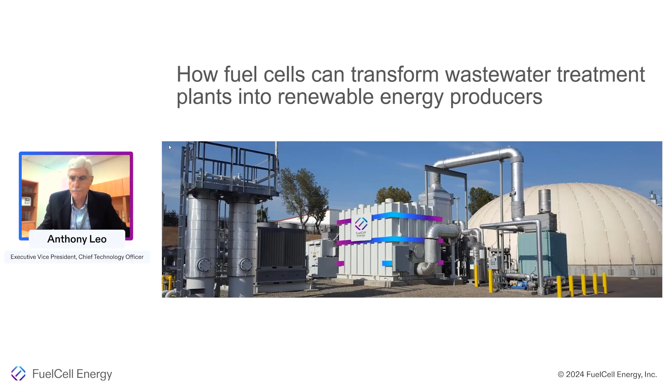Thanks, Luke, and good afternoon, everyone. I'm Tony Leo from FuelCell Energy, and I would like to talk about the things that fuel cells can do for wastewater treatment plant operators. And first, I'd like to spend a couple slides just talking about the company for those of you who may not be familiar with FuelCell.

So FuelCell Energy, we're based in Danbury, Connecticut, which is where our corporate headquarters is, our R&D facilities. We have a manufacturing facility about an hour away from Danbury in Torrington, Connecticut. We have facilities just outside of Munich in a town called Taufkirchen in Germany for final assembly and service of our European installations. And we have a facility in Calgary, Alberta, Canada, that is doing R&D and manufacturing of our solid oxide cell technology. What FuelCell does is we use electrochemical platforms to produce low carbon or zero carbon power, to capture CO2, and to produce hydrogen.

And if you look at the cluster of logos to the right of this slide, we have a variety of different customers, including utilities that buy power from our platforms, private companies that use our platforms for on-site combined heat and power generation, municipalities that install our fuel cells at wastewater treatment plants, which is obviously the focus of today's discussion. And we have been in business since the 60s. We have about 500 employees. And just under 100 of our platforms are in operation around the world.

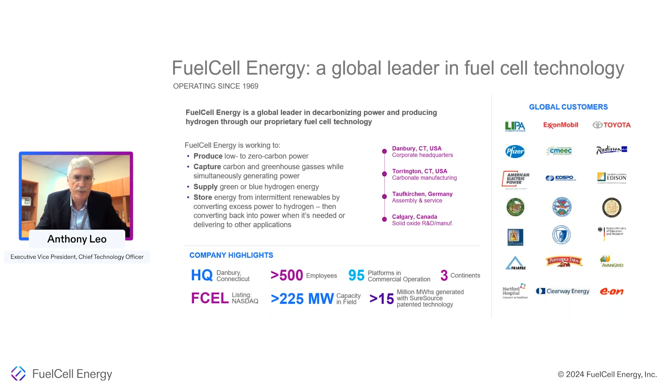Fuel cells, if you fuel them with a hydrocarbon fuel like natural gas or biogas, will produce a CO2 emission. But what's different from fuel cells and heat engines is that when they make CO2, it's before there's been any mixing with air, so it's very easy to extract the CO2 from these platforms before it gets emitted. I'll talk a little bit about that as we go along. The carbonate fuel cell, because of its unique electrochemistry, can actually capture CO2 from an external source, so we're looking at deploying that for carbon capture applications.

Both of these fuel cells are very fuel flexible, and so they can run on hydrogen blends or pure hydrogen in the case of solid oxide. Solid oxide can be run in reverse as an electrolysis platform to make hydrogen. And if you think about storing that hydrogen and using it back in a fuel cell, you start to enable some interesting long duration energy storage concepts.

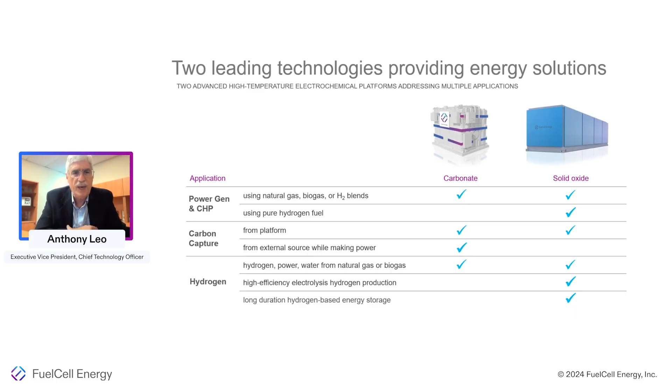So a fuel cell consists of a fuel electrode, an air electrode, and a thin layer between them called the electrolyte matrix. On either side of those electrodes is a thin corrugated steel layer that allows for the flow of gases, the air gases on one side and the fuel gases on the other side. That cell will make electricity when it's provided with fuel and air.

There are 400 of these cells stacked in the stack behind them, and that's our standard stack. And 4 of those stacks go into our standard module, which after DC to AC conversion and parasitics nets 1.4 megawatts. So one of those modules is used in our 1.4 megawatt platform, 2 of them in our 2.8 megawatt platform. We also have a platform that co-produces hydrogen along with power that uses 2 of those modules, and nets a little bit less, about 2.3 megawatts, because some of the power is used to compress and purify the hydrogen.

Both of those platforms can be configured to co-produce carbon dioxide as well, and I'll talk a little bit about that. So that 2-module system is the biggest system we make, but larger projects are done primarily by putting multiple units at a site. At the lower right is the biggest project in the world.

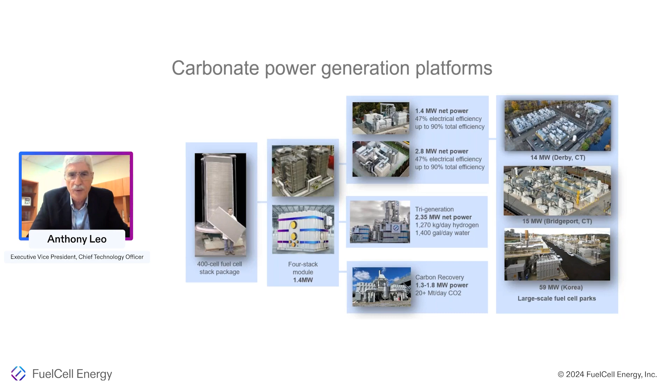It's a 59 megawatt system just outside of Seoul, South Korea. And you can see a 14 megawatt and a 15 megawatt system in different towns in Connecticut that have been put together from multiples of the 2.8 megawatt platform.

That system makes a good chunk of the power that they need. It also makes all the steam they need, so they've been able to turn off their gas-fired steam generators, which enhances the sustainability. And the other advantage is that in the event of a grid loss, which is unfortunately frequent in that area, the system can continue to make power feeding a dedicated isolated load. That's one of the key features of these systems, the ability they bring for resiliency.

We use waste heat in that system to make extra power in an organic Rankine turbine generator to enhance the sustainability and efficiency of that. That's an example of one of the advantages of fuel cells: 15 megawatts in the middle of downtown Bridgeport, Connecticut. You just couldn't put an engine generator or a gas turbine generator where we've put this system.

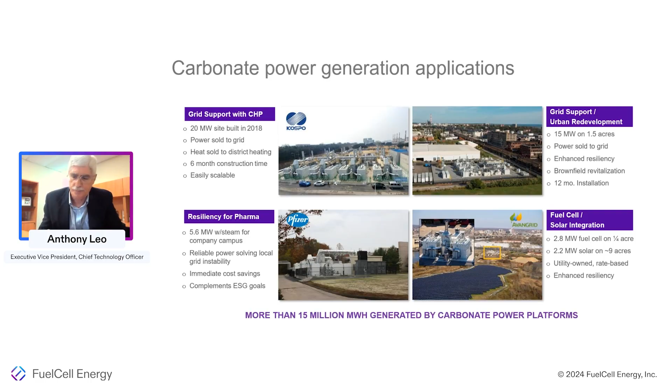If you look at operating these fuel cell systems, even a fuel cell system fueled with natural gas is still producing less CO2 than the average US grid, or many grids around the country, per kilowatt hour.

And so we avoid emissions while we run. We don't avoid as many emissions as wind and solar when they run, but we run around the clock and they don't. So when you look at that effect, we can actually avoid more emissions, more CO2, more NOx, more particulates than zero emission wind and solar, just because of our higher capacity factor.

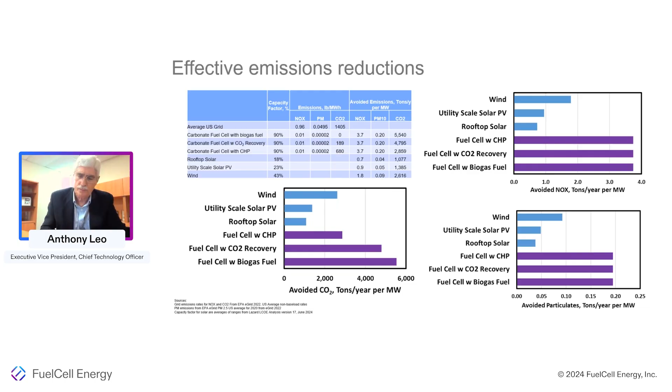So how can we apply this technology at treatment plants? We see a lot of benefits to the use of this kind of technology at wastewater treatment plants. Obviously, the on-site production of clean power and heat has immediate benefits to the plant operator. And in many cases, that electricity produced is not only renewable, but it's less expensive than what's available from the utility. Largely that's because you're using what is essentially a waste product, the methane from the digester, and you don't have to upgrade it to natural gas standards.

You have to do some cleanup. And so in many areas, especially like California, that could produce more economical power than the utility. That stems from the utilization of on-site biogas. You avoid flaring, you avoid the emissions from other types of combustion-based generators like engines or microturbines that have NOx and particulate emissions that the fuel cells don't have.

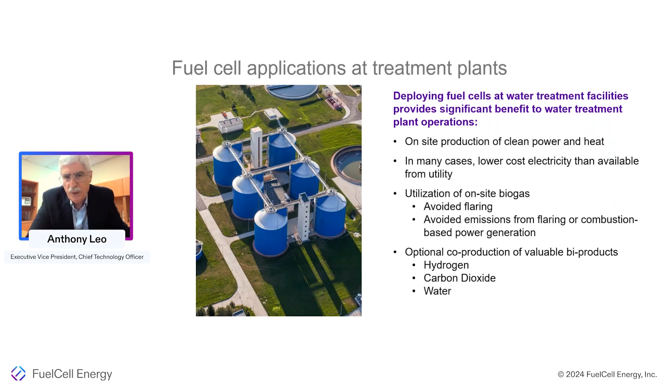And the other thing, which I'll talk about a little bit, and this is kind of new to us, is the optional co-production of valuable byproducts. We've done, and I'll talk about them, some wastewater treatment projects, but they haven't yet had these features except for the first ones that we're introducing now, where in addition to power and heat, we can optionally produce hydrogen, carbon dioxide, and water. So I'll talk a little bit about those new features that we're introducing.

So this is our approach to biogas, essentially, is we take the digester gas from the digester, and I'll talk a little bit about its constitution, but we essentially have to dry it out, take out the sulfur and the siloxanes. We can leave in the CO2 diluent and send that right to the fuel cell. The fuel cell produces electricity, and it also produces heat, and of course the digesters use heat. A few slides down, I'll give an example of the amount of heat and power that matches with a certain size of digester.

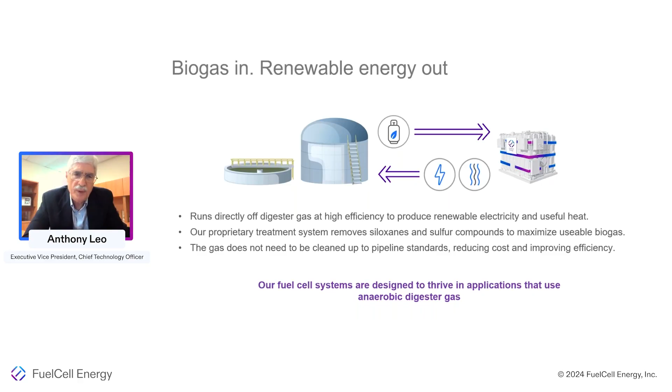So that's the key feature, is there's less cleanup needed compared to if you wanted to inject it into the natural gas grid. And as I'll talk about, carbonate in particular is uniquely suited to this because of its chemistry.

So what are the differences between natural gas and digester gas? We started thinking about commercializing carbonate fuel cells in the late 1990s and shipped our first commercial system in 2003. We were designing these systems for natural gas. It's 90 to 100% methane, and the balance is usually higher hydrocarbons, 900 to 1,000 BTUs per cubic foot. It's very dry, almost never has any oxygen in it except areas that used to do peak shaving. And it's odorized for safety with a little bit of sulfur put in, typically 3 ppm, at most 20 ppm.

And that sulfur is a poison to fuel cells, so we have to clean that out. We have a system in every one of our platforms that cleans out that sulfur. If you look at digester gas, it's much more dilute. It's 50 to 80% methane. Most of the municipal wastewater treatment digesters are about 60% methane, 40% CO2. The higher concentration methane content is what we see in, say, a brewery or a food processor digester. So that's 500 to 800 BTUs per cubic foot versus 1,000 for natural gas. It's typically 550 BTUs per cubic foot.

It comes out of the digester saturated at the digester temperature, so it's high humidity. It can have oxygen from bleeding into the digester for some types of digesters, so it can have a little bit of oxygen in it. And the sulfur, instead of being up to 20 ppm, is hundreds of ppm or even higher, and it also contains siloxane. So as we started to commercialize based on natural gas, we got a lot of interest in using these systems in biogas systems because it's both methane fuel. You just have to deal with these differences.

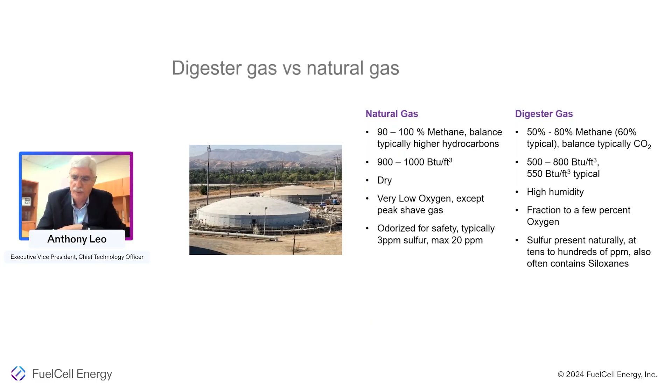And in fact, as things rolled out, what happened is that first system that we shipped commercially in 2003, the customer told us relatively late in the development of the project, by the way, I want to run this on my digester gas.

So this was a project that was going to a Kirin brewery in Japan. And they told us fairly late in the development of the project that we don't have line of sight to getting the LNG that we need to fuel this, but we do have a digester that we use to reduce our solid waste as we make beer. So we'd like you to run this on digester gas.

So we took a look at it, and we realized that we had the capability to do that. We had to do some extra upfront cleanup that we put together. And that was our first commercial system. It was a 250 kilowatt system at that brewery in Japan back in 2003.

That was followed by a couple other projects at breweries, a few food waste digestion applications in both Japan and in the US, and a lot of municipal wastewater treatment plants. Along that way, we learned what to do and what not to do in this application, and we developed this advanced feature set.

We had to make sure the systems had the flow capability to handle that lower BTU content and still make the rated output. We recognize that some of these digester sources fluctuate and are not 100% reliable, and we like to keep the fuel cell running. So we developed dual fuel features where if the digester output went down, we could augment it with natural gas, and then blend back to the full digester gas when it became available.

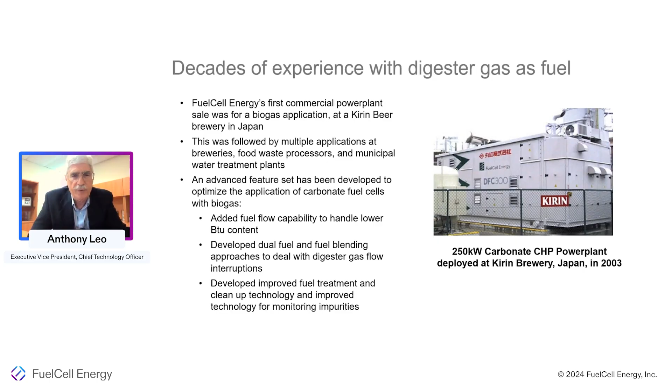That's really helped us as we've addressed this market with some very unique capabilities. So here's a summary of those advantages. The one thing I mentioned is that you don't have to upgrade the fuel to natural gas standards. You have to take out that water, you have to take out the sulfur and the siloxanes, but you can leave in that 40% CO2.

And that's because carbonate fuel cells don't particularly care about that CO2. As I'll show in a couple slides, there's a slight performance impact for our solid oxide fuel cell, but with the carbonate electrochemistry, there's one electrode that actually likes the extra CO2, and there's another electrode that has an impact. So at net, there really is no impact of the CO2 dilution.

I mentioned that we've developed these dual fuel capabilities that allow us to deal with the fluctuations coming out of the system. And the gas cleanup, we've really optimized that, primarily looking at reliability as the key thing. We don't want to have system issues that end up poisoning the fuel cell. So it's laid out there schematically in terms of the raw sulfur removal, compression and drying, siloxane and sulfur removal, and then polishing, and then it's ready for the fuel cell.

And just to make sure that the gas is as clean as it needs to be, we've developed some patented approaches to continuously measuring very, very low sulfur levels, because there wasn't off-the-shelf technology available. So they're deployed primarily as combined heat and power platforms, and as you know, there are plenty of uses for heat in a wastewater treatment plant. I'll give you some examples of some of these systems deployed in CHP applications at wastewater treatment plants.

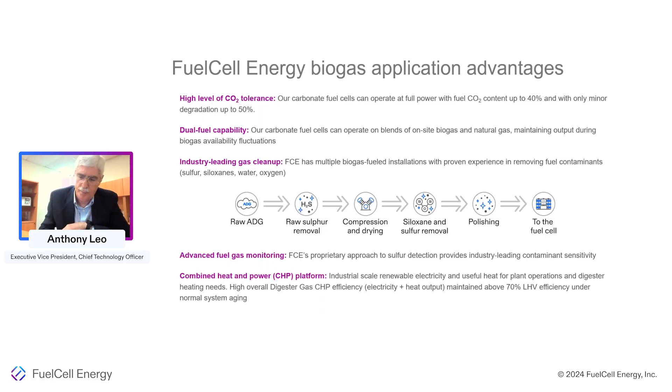So here's three of the most recent. There's a 1.4 megawatt system at the city of Riverside in California, and it essentially produces electricity for use on site by the city of Riverside. As is almost always done in these projects, the waste heat from the fuel cell is used to support the anaerobic digester. The heat is fed back into the digester in a hot water loop.

At San Bernardino, California, a very similar system, a 1.4 megawatt system. This is power that is consumed on site, and the heat again supports the digesters. And at Tulare, again in California, that's a 2.8 megawatt system.

In this particular case, Tulare already had on-site power generation. They didn't need the power, so we sell the electricity. The renewable electricity from the unit is sold into the grid under California's BioMAT, which is a renewable feed-in tariff program.

So different business models there. In the case of the other two, it's on-site power generation, reducing the utility offtake. In case number 3, we're buying the gas from Tulare and producing power that we sell under that feed-in tariff to the local utility.

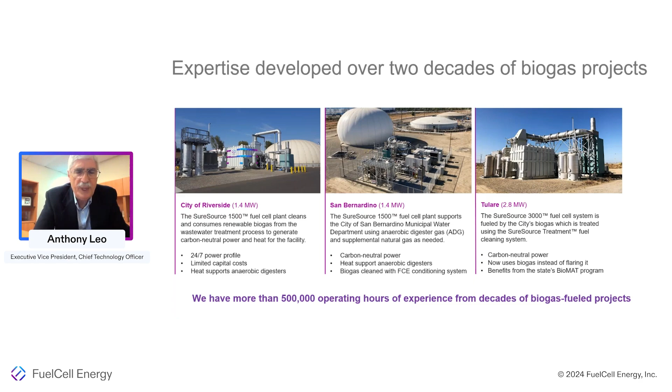And so, like I said, 2 decades of biogas projects since that first one in 2003, more than 500,000 operating hours. And so we've had the time and experience and the bruises here and there to really optimize the way these things interface with digesters.

We were the first distributed technology to be certified by CARB for operation on biogas at low emissions. CARB, the California Air Resources Board, runs a certification project for distributed generators. It has been in place for many years for natural gas fuel generators, and they started some time ago to certify biogas systems. What they basically do is have a third party test your emissions, and they certify that you're below some target emissions around NOx, SOx, VOCs, and carbon monoxide. We have that certification for all of our platforms.

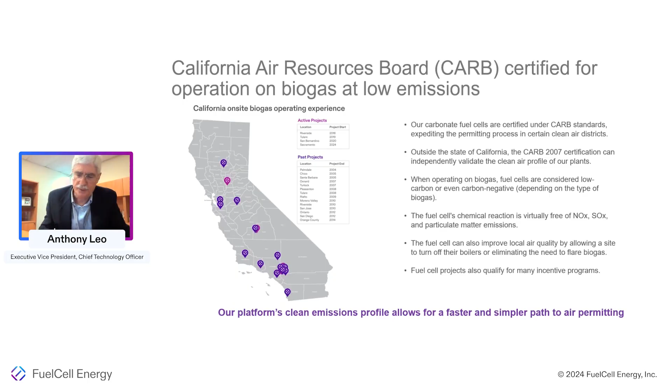And that map on the left shows the current and past projects. We've been doing these projects for a long time. Some of them have just run their normal project life. We continue to do them, and we just announced one recently for Sacramento Sewer District. We continue to operate the units we have there and expect to announce more projects as we go forward. So just a little bit of a technical discussion about the equipment.

This is the specifications for the carbonate fuel cell power generation platform. We have 2, one that makes 1.4 megawatts and the other that makes 2.8 megawatts. There's a lot of heat available for recovery, very low emissions. Both of these systems' specifications are the same, whether running on natural gas or on-site biogas.

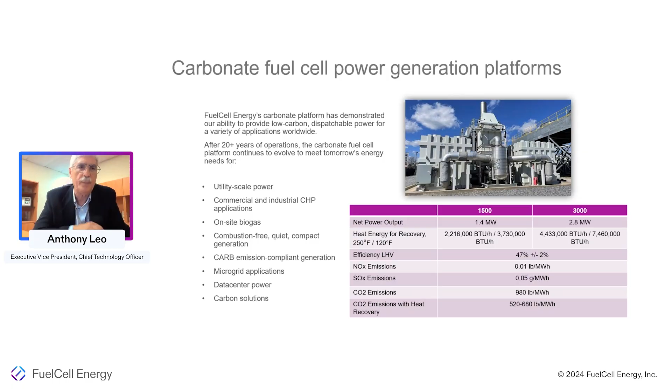This is the specification for our solid oxide platform. You'll notice there are 2 different sets of specs, slightly different for natural gas versus biogas. Solid oxide doesn't have that advantage carbonate has in terms of the electrochemistry not being affected by CO2 dilution, so efficiency drops down a little bit, but we can still make the same amount of power. The real advantage of this platform versus carbonate is we've had to walk away from a lot of opportunities at smaller digesters because the carbonate platform is just too big. So this platform at 250 kilowatts will help us address that market as we go forward.

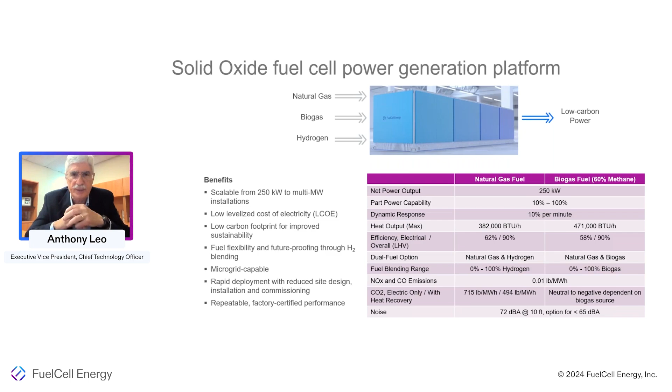Just to give you an idea of the size matching of these systems to a digester, this is an illustrative view of how much fuel a carbonate fuel cell makes as it makes power. This is an example of a 1.4 megawatt system. It runs at 47% efficiency, so it needs about 3 megawatts of fuel. That would come from, and this varies depending on the type of digester, something on the order of a 45 million gallon a day digester, which would be a good match for a 1.4 megawatt system.

That 1.4 megawatt system puts out more heat than is needed to support that amount of digester production, but typically we're matched to a digester that's much bigger than what we need, so they need all the heat we can provide. It produces 1.4 megawatts of power. In this example, 1.4 million BTUs per hour of heat supports the digester operation, and there's about 2 million BTUs per hour of heat available for other applications, either if the digester is bigger or if there are other heat uses on site. So that's just an idea of the size of equipment for a given size of digester.

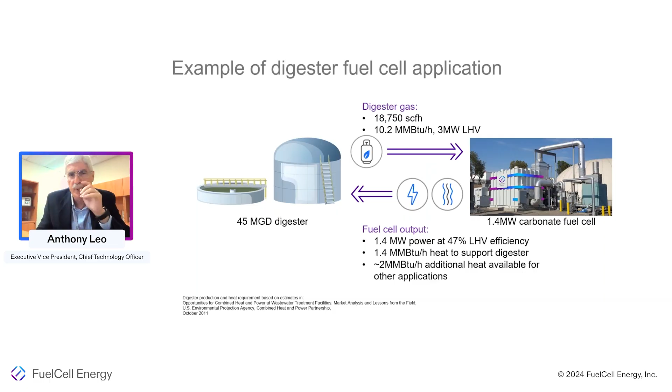Now I'll talk a little bit about those applications I mentioned where we make additional co-products. This slide illustrates 2 applications we call CO2 recovery and CO2 capture. In carbon recovery, that's the name we've given to when we capture our own CO2. We can grab the CO2 in the system before it gets mixed with air, purify it, and export it before we emit it. That's a really good application for a customer who uses CO2, because you're making 10 or 20 tons a day of CO2 from one of these systems. That's too little to really support a sequestration application, but for on-site utilization, it's perfect. So you can imagine these things running, providing power, heat, and CO2 to the process.

And there's a list of potential applications there. We're talking to customers really in all those applications right now. One of them is water treatment. I know CO2 is sometimes used for pH adjustment, so that could be another aspect you might consider when looking at carbonate fuel cells being deployed at wastewater treatment plants.

On the right there is our second application, carbon capture. That's where we capture the CO2 from an external source, in addition to capturing our own CO2. That can just produce more CO2, but it can also, if you've got on-site boilers that are gas-fed, help avoid the CO2 emissions from those. Right now we are offering that commercially. It requires a certain derate for the power plant because of the energy required for the CO2 capture.

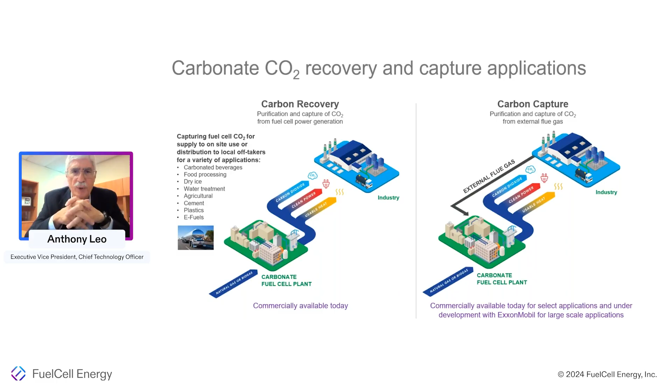You may be aware that we're working with ExxonMobil to optimize the technology for larger systems and to improve the power output while we do CO2 capture. But it is available today for smaller commercial systems that need CO2 from small gas-fired boilers. So that's the CO2 co-production.

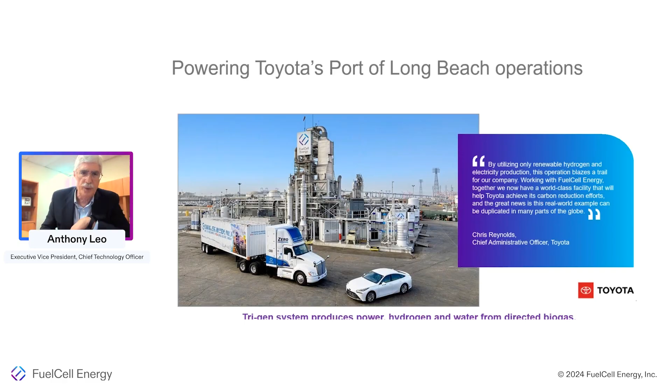Just to show you exactly how it fits together, the way our fuel cells work, whether it's natural gas or biogas, both are methane fuels. The first thing that happens inside our stack is the methane is converted to hydrogen in a reforming reaction, fed from heat and water from the fuel cell. It's a very efficient way to make hydrogen, and there's no combustion the way there is in conventional hydrogen production, and no water consumption. In fact, it's a net water producer. So that lack of combustion means lower CO2 emissions and also lower criteria pollutants.

In the case of the Toyota project, we're fueling it with so-called directed biogas, or book-and-claim biogas, so it's renewable power. This system produces up to 2.3 megawatts of electricity. Toyota needs a few hundred kilowatts of it, and the balance is sold to that same feed-in tariff I mentioned before for the Tulare project, the BioMAT feed-in tariff. It produces 1,200 kilograms of hydrogen a day, and also 1,400 gallons of water a day.

That was something we hadn't paid much attention to until we found out Toyota has a major car washing operation at this facility. All the cars that come in need to be washed, and it is often in a drought situation. So the fact that we can reduce their city water consumption by 1,400 gallons a day is a significant enhancement to the sustainability of this particular project. A very, very successful approach to improving sustainability, a key part of Toyota's drive to make that a net zero operation at their port facility. So really thrilled with getting this off the ground.

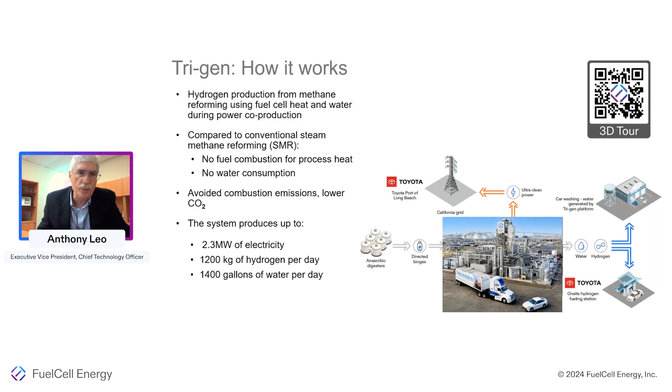This is the first full-scale commercial project with this technology we call Trigen, because of its production of power, heat, hydrogen, and water. Getting back to wastewater treatment plants, we actually think Trigen would be a really good application there, and may be the best value proposition because you enjoy the low-cost renewable fuel, and all the other advantages as far as minimal fuel upgrading required apply in this application. The co-production of power, heat, and water can support the water treatment facility operation, and the hydrogen offtake can be utilized in a variety of different ways.

Interestingly enough, the very first demonstration of this Trigen technology was a 250 kilowatt unit demonstrated at the wastewater treatment plant of the Orange County Sanitation District in Fountain Valley, California, using on-site biogas, and they actually had an on-site hydrogen filling station there. So this is an example, as there's more and more demand for hydrogen, of another way wastewater treatment operators can think of enhancing the value of the renewable fuel they make while doing their treatment operation. In addition to supporting their own power, heat, and water needs, the ability to provide hydrogen can really enhance the economics of their operation.